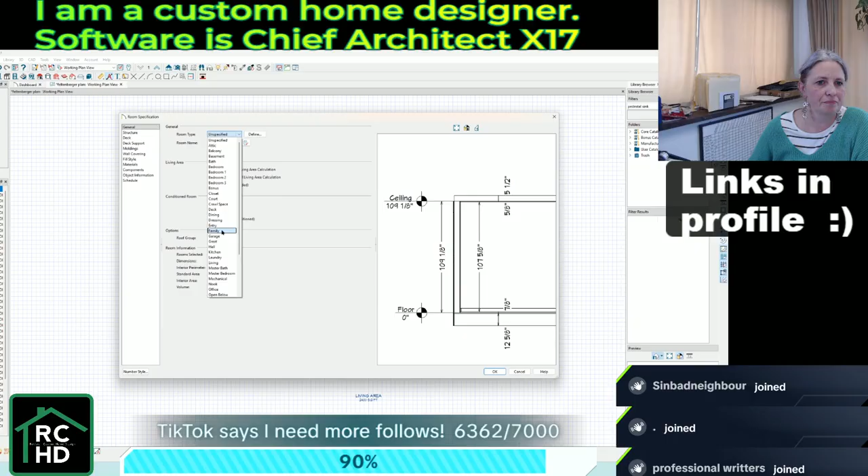So we've got our living half and our garage half. Let's get these dimensions out of the way. Right now it's showing me that my living area is 2,400 square feet, but that's because I haven't done this yet. Boom, garage. So now our living space immediately drops down to 1018, which is our 25 by 40 side of the house.

All right, super easy. I already have my default set at 9 foot. We're going to go with standard door heights throughout this. Over on this side, we want to do our garage doors, and he wants 2 9-foot doors. So there we go, and those are both 9 foot. Then we just make it all nice and even.

So garage, basically done, pretty straightforward. Probably just to be safe, we might throw a door back here at the corner. And then I'm going to change it to a slab because we don't need windows on that door. Again, just to make the numbers nice and easy, give us whole number spacing. So like I said, there's the garage.

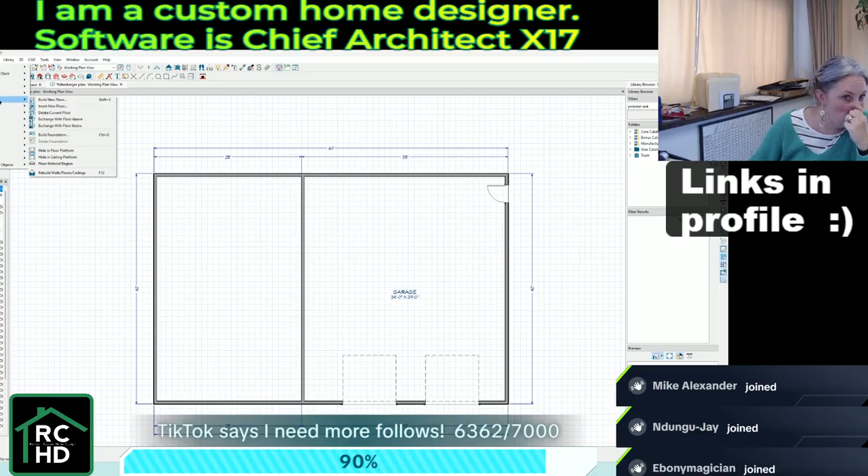As long as we're at it, we might as well do the other really simple stuff. So we will build our foundation, which is, let me double check, it's either a monoslab or a crawl space. Monoslab. Okay.

And then we just double check our garage and make sure that the software didn't decide to make it a big giant drop. Right now it's 3.5 inches below the main house. So the slab is essentially poured with that little bit of an offset. Keeps any moisture from getting into the house, bugs, that kind of thing, well, doesn't really help with bugs, but whatever.

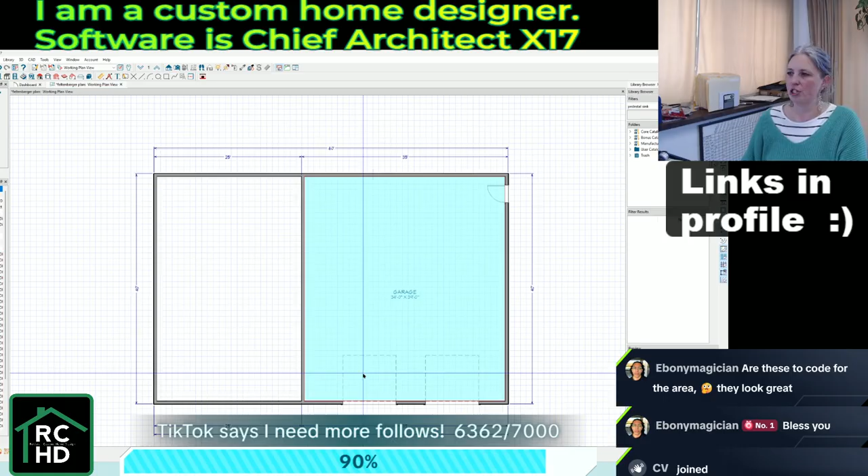Are these to code for the area? This is just general building code. This one's being built in Montana. There's really minimal code in this particular area. It's county land, so other than just typical, we don't want the building to fall down code, that's what we're working with. And then standard spacing for like plumbing, toilets, and all that kind of stuff.

So the second thing that we're going to do super fast is the roof. Now, I could use automatic roof tools, but this is the simplest roof ever, so manual roof tools will actually be faster. So we go like that, use hotkey number 2 to join, and then we double check our 18-inch overhang. Boom.

Drag there. And then I don't remember if the client had specified. Sometimes clients know what they're doing and they'll specify a roof pitch. This one I don't think did, and I don't think we have any vaulted ceilings or anything like that. So, nope, no vaults, so this one's going to be really easy. In this neck of the woods, I'm going to just make this a 4-12 for our pitch. So that means if we were to go outside right now, there we go, we have the simplest, most basic house there is, which is awesome.

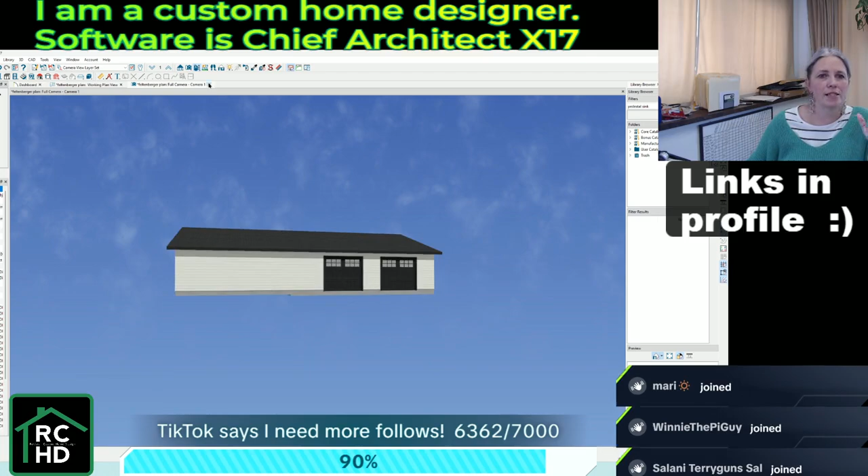Exactly what this client wants. Okay, and then my preference, I always move my roof to display on the floor above. I want it to display on the attic level. So if I go up there, now you can see there's my roof. Just makes it easier when it comes time to do layout pages.

So, all right, easy stuff out of the way. Now we move into the house. For the house, we want 2 bedrooms, 1 bath, and then basically laundry, kitchen, living room. So the easiest way to do something like this, we're going to grab our things.

2 bedrooms, 1 bath. Double check here. Okay, so normally speaking, even though technically it's 1 bath, we are going to rough plumb for a bathroom out in the garage. So I'm just going to make a quick little note here.

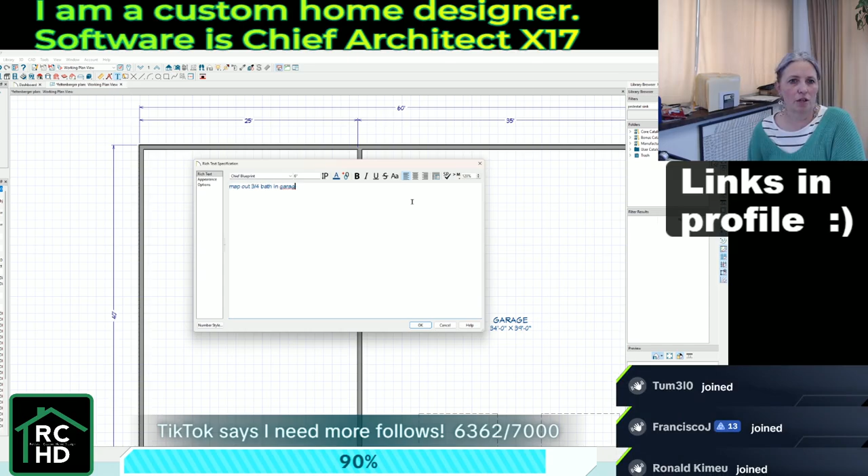Map out 3/4 bath in garage. I just do this to make notes for myself so that I don't forget to come back and do this later. So this first bathroom, the one that's actually in the house, is essentially kind of the master bath, but it is the shared bath.

We want, okay, 3 walls of tile with a shower curtain for the shower. There is no tub. 1 sink, and the toilet can just be open. It doesn't need to have its own closet. So this is not an incredibly huge master bath or master bedroom. So we're going to go ahead and just kind of grab this, grab that, and then let's do something.

We want the bathroom to be accessible to both the master bedroom and the guest bedroom, because this is the only bathroom in the house. So we need to figure out how we want to map this out, because of course the issue is you need your bedrooms to have egress.

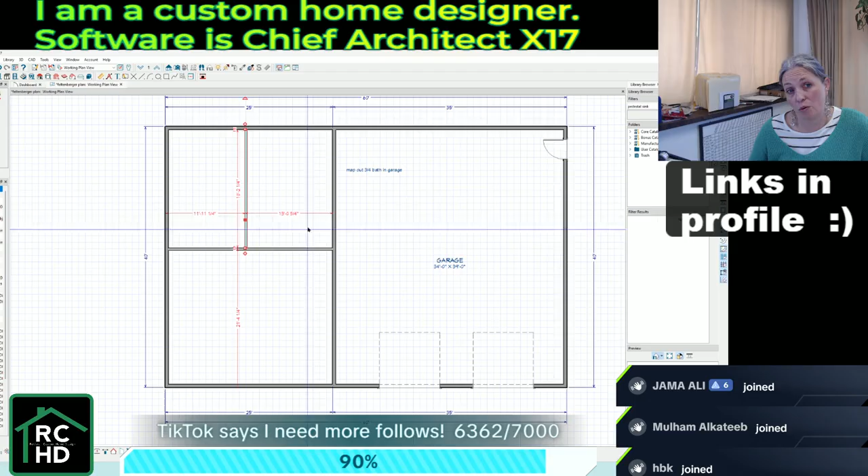So your bedrooms have to be touching an exterior wall. So my first thought would have been, tuck the bathroom here and then have bedroom, but that's not going to work. So I think what we're going to do here is...

Actually what we could do, hold on. There's 2 ways we could do this. And this is where literally I am diving in. This is my brainstorming session. I brainstorm while I'm working on this because that's just how things work. So there's 2 ways that we could orient this house.

We could have the 2 bedrooms back here and then somehow carve out the bathroom wherever. The other option is to do bedroom back here, bedroom up here. Excuse me, sorry. I had one of these monster drinks today, and I'm not a huge fan, but I gave up soda a while back, so I'm not used to all the sugar and carbonation and whatever.

Anywho, so we could have 1 bedroom in the front, 1 bedroom in the back, bathroom kind of in that pass-through, but then that kind of stretches out this whole kitchen, living, dining kind of long and narrow. And I think I do want to try and keep this part open as much as possible. So that being said, our bedrooms are going to go back here like this.

And then we'll probably do like bathroom. Let's do, again just notes to myself, kitchen, living, bath. And then those will be the bedrooms. We'll do closets. And then if that's the bathroom, we'll also do kind of like, see, that breaks it up a little bit more. I don't really like this.

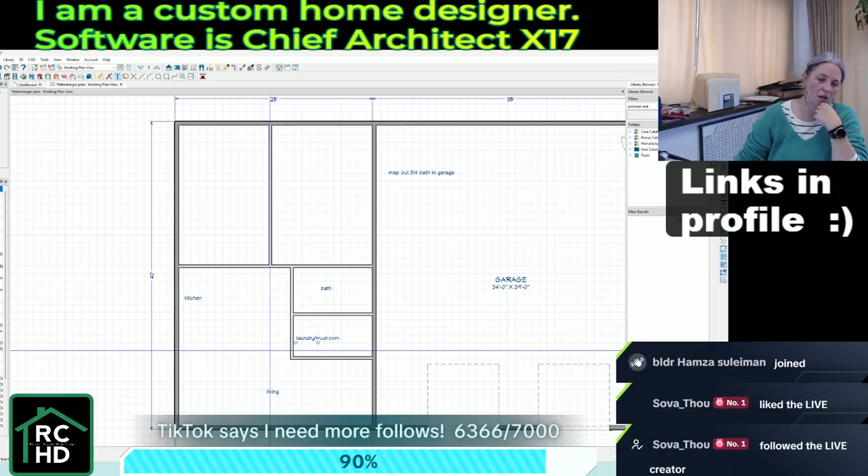Okay, so now let's start throwing some dimensions in here real quick. All right, so 18 is definitely deeper than it needs to be. Let's quick go to 16. Oh, we need...

And we do want one of these to be slightly larger than the other. Normally I would say I'd want this corner one to be the master, but I kind of want the master to be closer to the bathroom, so I don't know. Actually, let's do this. Let's do like that, ish. And then one of these can have kind of a slightly bigger closet.

So yeah, let's make this one the master. Let's do 11-foot one there. Okay. Closet 2-foot one. 3'7" maybe? That should do it.

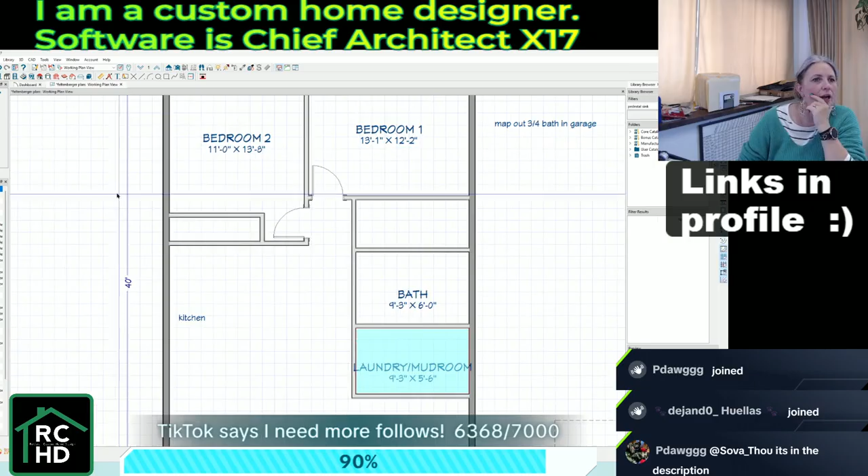Thank you. Okay, door. So then we want to go into the bathroom here. We'll do a walk-in closet here. And we'll do sliders for that closet. Okay.

Bathroom will be like this. He was going to do tile on 3 sides and a shower curtain on the other. So actually, this bathroom does not need to be 6 foot, we can go to 5 foot. There we go.

Okay, so that puts us with a shower pan, and we're just going to do, there we go. And then for our shower pan, it's going to be 60 by 30. Toilet. Okay.

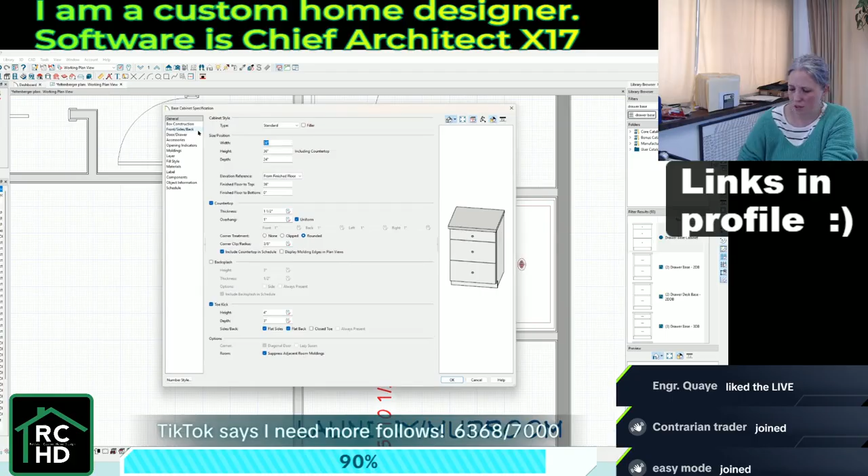Let's make that a 9-inch drawer base. And then we need a standard sink base. Copy, paste. So we have 7 inches left, so that's enough for each of these to be, okay, and then

Undermount sink. I'm going through this as fast as I possibly can.

Okay, so there's our walk-in closet. And actually, if we want to get a little more space out of it, we can flip that door, flip the hinge, do that, and add a little bit more there. So, all right, so now we've got that closet.

13 by 12, that's a little on the small side. But 11 is really on the small side for that. Shoot. Yeah, this is not huge, because he did say he wanted a king size bed in here. Oh man.

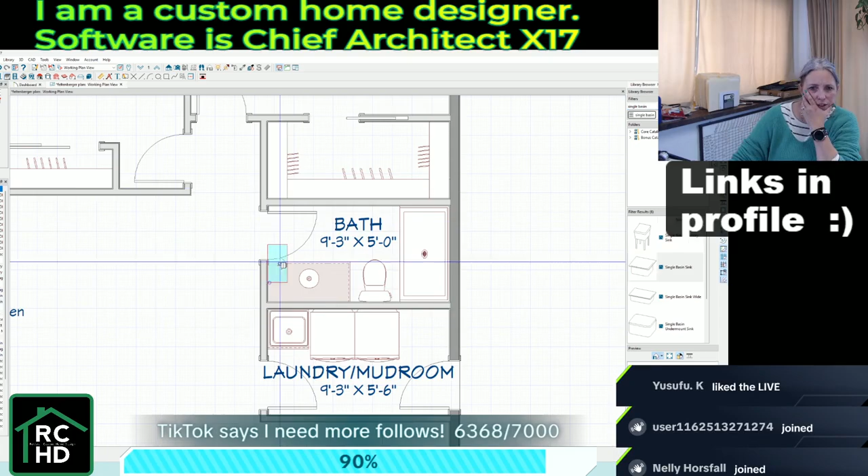Okay, laundry. Okay, side by side and a sink. Okay, then we need a base cabinet. We have our sink, and then we should probably do either, I'm going to do a tall cabinet here.

Yeah, but normally I would agree with you, but the client did want a walk-in closet for the master. So, because yeah, normally that's what you do is you do that in the dividing space in between the two. But even at that, that takes up 2 feet here.

That would make, I don't know, because here I got to get a king. Let me grab a king bed here. So there's a king bed, which is not terrible. But if you cut that in half to get the closet, A, you lose closet space, and B, we'd have to create a different way to get in. It just eats up a lot.

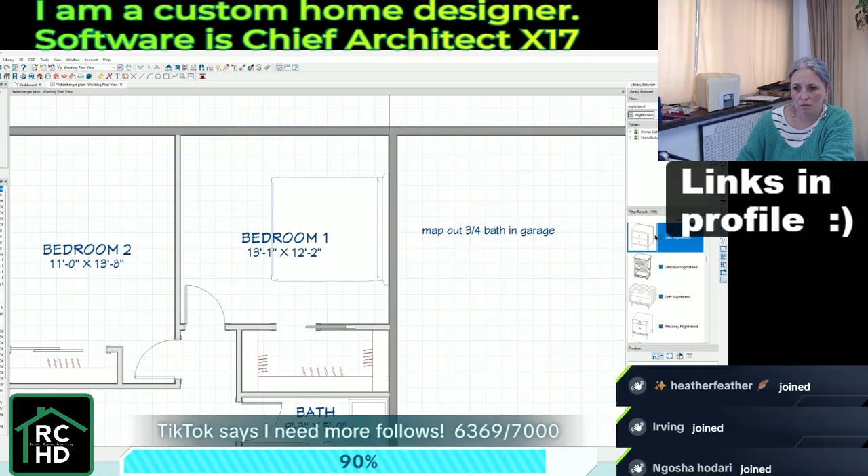Okay, then we need a nightstand. That's kind of cute. Okay.

Let's do that, the other bedroom here. See, we also want a king in that bedroom. So, and this is where people don't realize how much space some of this stuff actually takes up. So we can get another nightstand, 2 nightstands and a bed in there, but in this room, we don't have room for a dresser. In this room, we do. So, personal preference.

Okay, oh, shower curtain.

So we have the closet, we've got a small closet, bedroom. Laundry, mudroom is pretty straightforward. You come in from the garage, you got your sink and

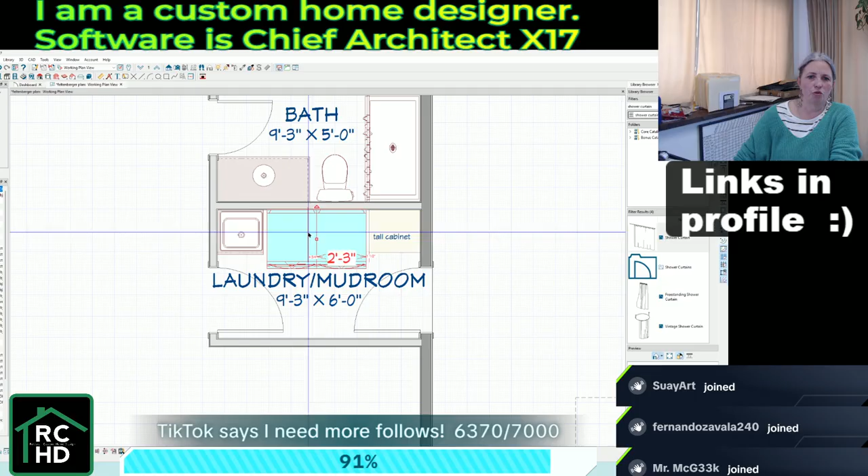That. Normally, I'm going to add a couple inches, because generally speaking, I don't like to do small doors on the laundry room because A, it's a frequently passaged area, and B, if you ever have to do maintenance on those machines or get them in and out, you don't want to be in a situation where you've created a pocket where you have to take the door off the hinges to get that machine out. So we'll do some upper cabinets here real quick.

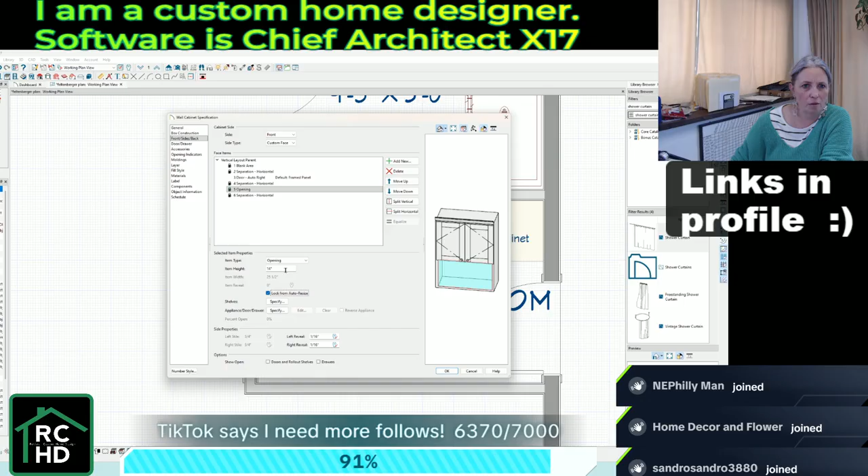And then on this one, so it creates... actually let's make that a little bit shallower. And then box construction, we're going to get rid of the bottom, so we have just that above the sink.

Okay. All right. And we got a 36-inch door. Awesome, thank you for the follow. All right, so here's our living room, here's our kitchen. I'm just going to call this whole thing great room.

And I probably asked some dumb questions during this because, yep, there's no walk-in pantry, no seating at the island or peninsula, so that's good.

Honestly, I think we're probably gonna do like a little U-shaped kitchen here. And actually, you know what I might do? Here, hold on, let me pull up a different file here.

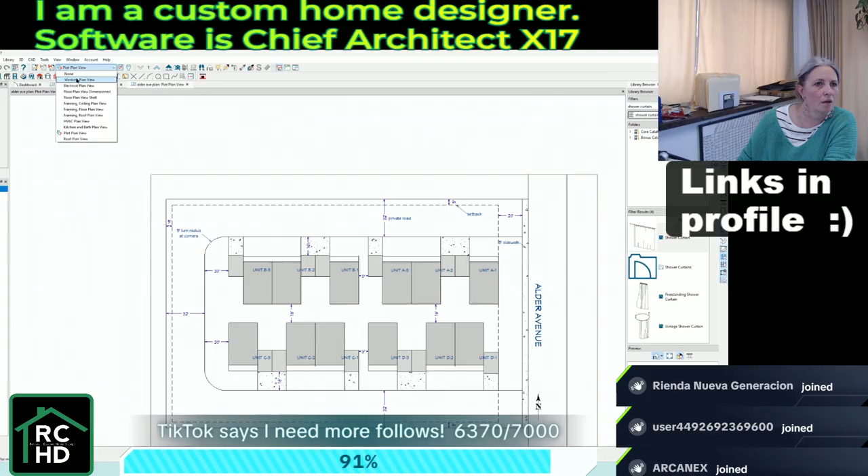Ah, here we go. Okay. Hold on, I want that. Copy, paste, rotate. There we go. Super easy. And then I can close that.

So that made that really easy, because I already know that this is a compact space-saving kitchen. I know it fits. Oh, holy cow, that fit like perfectly. And then push that on over.

And then we just need to check our dimension here to here. We'll do, actually, let's do 3'9". There we go. And then here we're going to do just a little half wall to back this up.

But the client did say he didn't need an extra eat-in area or anything like that. And then I am going to add a little more cabinetry here, because I feel like we just need that extra little bit of space.

And honestly, I'm going to put the dishwasher on that side. Okay. There we go. And then if we were to look at that in 3D.

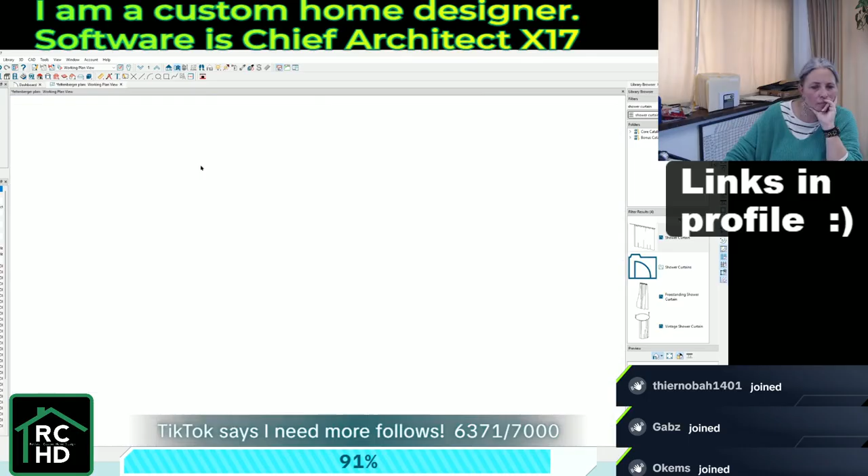Okay, so what I do need to do is I need to get rid of the cap on this wall. And then extend the countertop just a couple inches just to make it look finished. So we're going to come over here.

Grab that, and then I'm just going to drag that down to the end. Okay, so if we look at that in 3D, now you can see we just have that nice little finished edge on it.

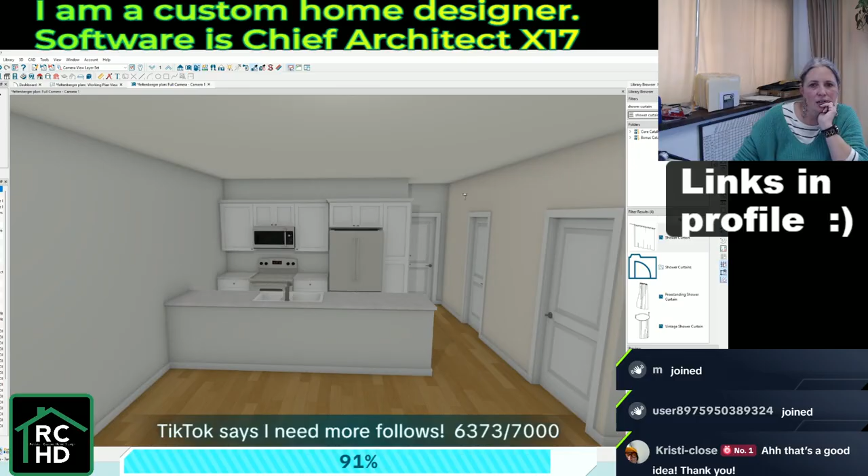Then, okay, and, oh hold on one sec, that is an electric range. We want a gas range. So let's quick pull that out.

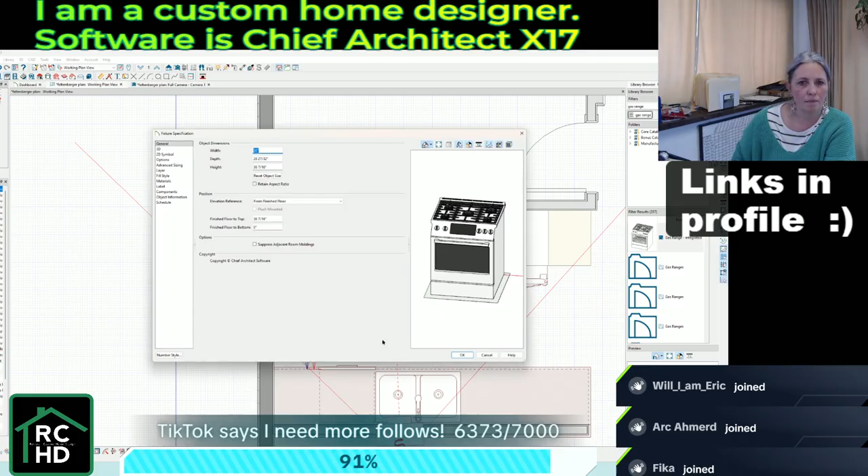Hold on, go to plan view, it's easier sometimes. Okay, so we got our range. Again, we need to change the color. And then slide-in range, microwave above the stove, 30-inch.

Cabinets do go up to the ceiling, so that is one change that we need to make here. Oops. Okay, so we need upper, okay, let's take this one. We're going to duplicate this cabinet. So we're just going to drag that on up. Floor to bottom is 90, that's correct.

That's correct. Okay, so then we can go ahead and remove the crown from these cabinets.

This crown we're going to change to a shaker style, and I'll use base molding. Make sure to offset that so it goes up, so essentially that fills that gap up there at the top.

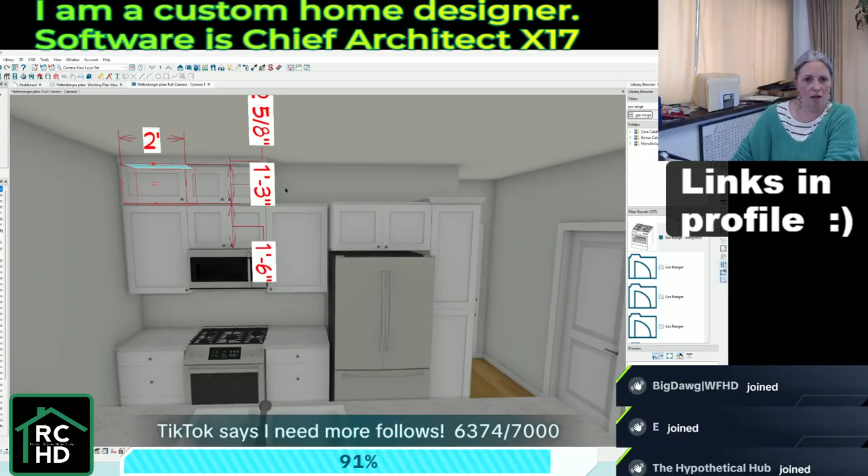Okay, then we're going to make a copy, drag it that way. We know it needs to be 24 inches wide. We know that the hinge is on the wrong side. Okay, copy, paste, but now the hinge is on the wrong side again.

Okay, make another copy. This one needs to be 36 inches wide. The height is correct, the depth is 24. Floor to the bottom is 90.

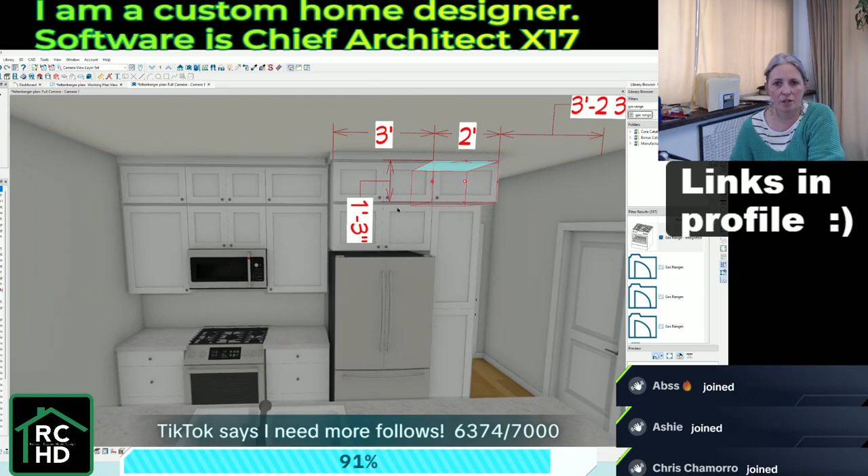And then this tall cabinet, again, we get rid of the moldings on that one. This needs to be 24 inches for the depth. And then we'll slide that over. And this cabinet is only 18 inches, so there we go. So now we have our bank of cabinets.

Now on this one I did an end cap cabinet, but because they're both finished, I think it works. And then real quick on this one, we're just going to go to our right side, custom, and instead of door, we're just going to do door panel, so that way we don't have the hardware on that side. But now you see we have this finished corner. So there we go. And then our cabinets go all the way up to the ceiling, so we've got lots of storage there. We should probably do the same thing in our laundry room.

Hold on. So we'll real quick go in here. We'll get rid of that molding. I'm going to come over here, grab this cabinet, copy, paste, make this one 2'3".

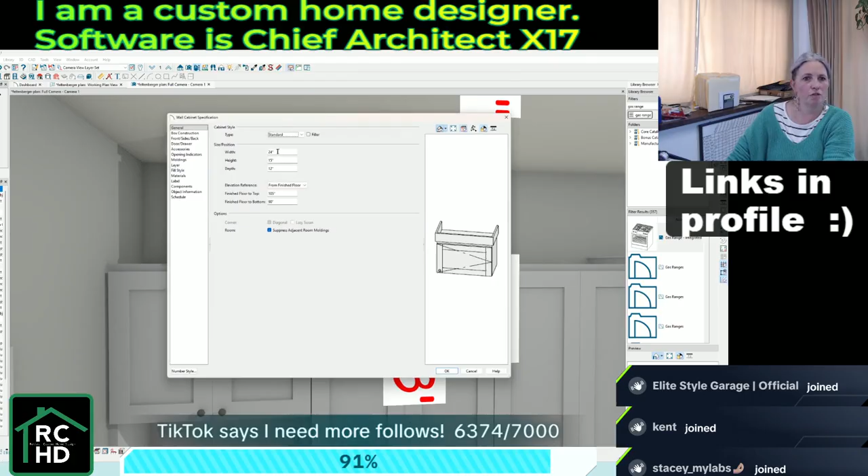Oops. It's weird because if you're almost about to hit the wall and you try not to hit it, it'll stop you. But if you already go through the wall and then try not to hit it again, it'll keep going. Okay, so copy, paste.

Paste, and then this one, oh, also the same, so paste, except that one needs to be 24 inches for the depth. And again, the tall cabinet, we need to delete that molding.

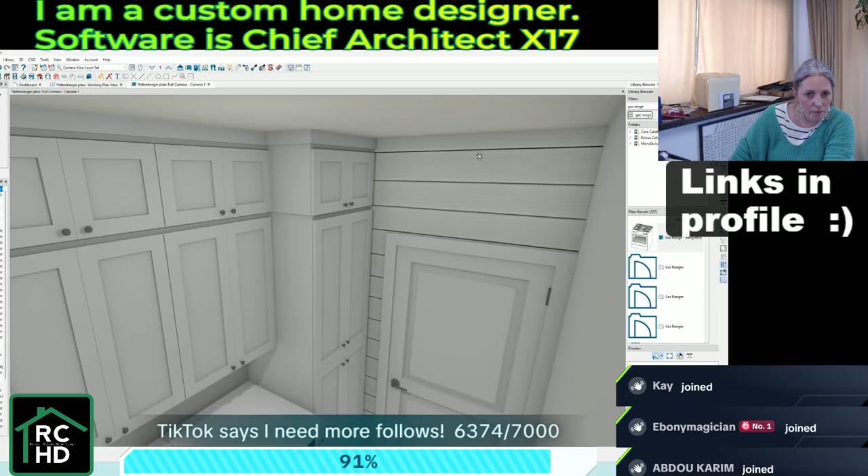All right, so now we've just made our cabinetry in our mudroom awesome as well. Easy. Okay, I see I've got siding on this wall.

Apparently I forgot to pull that off when I... all right, so that got our siding off of that wall.

Okay, next, windows. You wanted to do sliders.

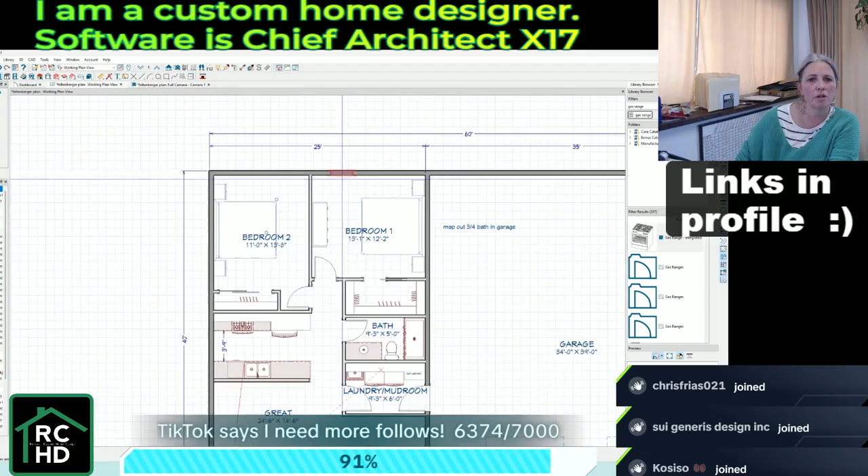Okay, so we're going to go here, grab our window tool, go into the bedroom. We're going to make these right sliding, doesn't matter if it's right or left for the moment. We're going to do 60 by, we'll make them good sized, 60 by 54. We'll hit OK, copy, paste, make nice even spacing.

Here we're going to do a casement instead because there's not enough space otherwise, but we might as well add a little window there. And then we want to do like a patio door.

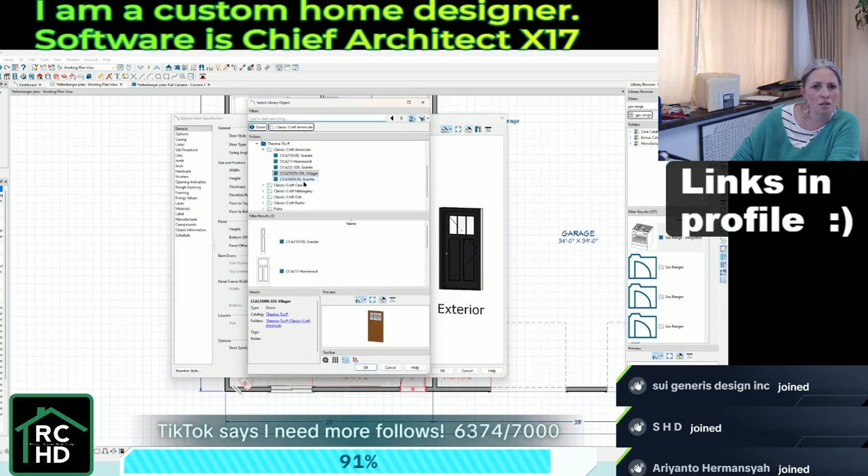And then we need to do a front door, and I'm going to just change the look of this one a little bit. That one. And I'm actually thinking, let's kind of move that.

He said he wanted 6 seats at the dining room table, but that seems a lot for this house. I'm going to pull that chair real quick. That's kind of a cute one.

So we'll do that. And then so you can probably fit 6 around this. Yeah, actually, let's do that. So let's delete. Let's.

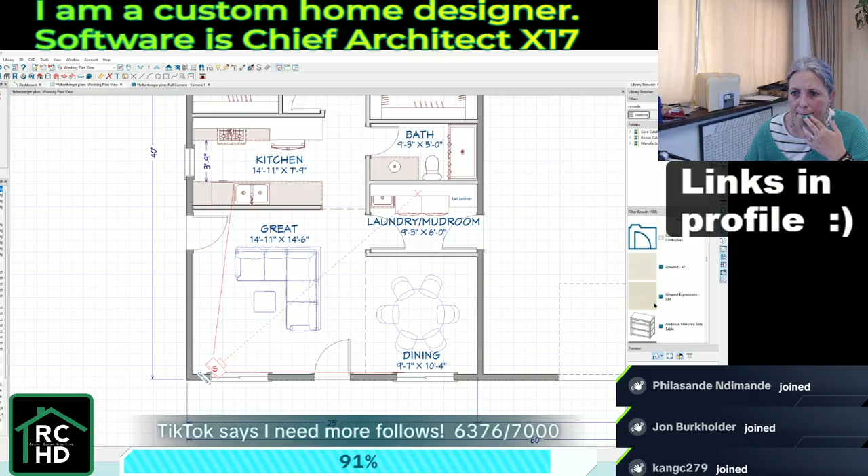Okay, and then that's massive. Oh, that's kind of cute. Okay, so we'll throw that in here.

All right, so then if we look in our view, I like this dark fabric. I wonder if I can get that on the sofa. Oh, yeah, yeah. Chair. The ottoman's too much.

Okay, so then we'll move our camera to the exterior. For the exterior, he wanted like a dark beige tan metal siding. So pull up standing seam. Here's beige.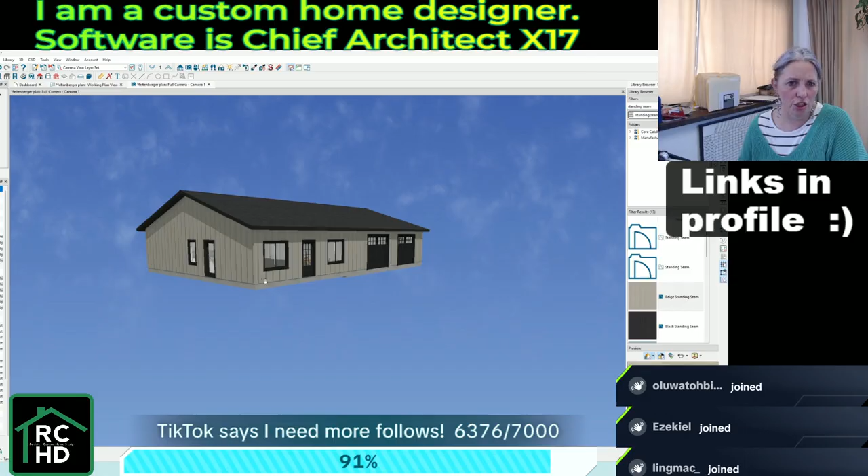Okay, and we need to paint that door. And then black trim, yes. Dark green for the roofing. And again, we're doing metal. And no stone or brick.

I'm not sure, I wonder what the... there's the brown. Yeah, let's do the brown. Okay, so black trim, brown siding, green roof. I think that looks good.

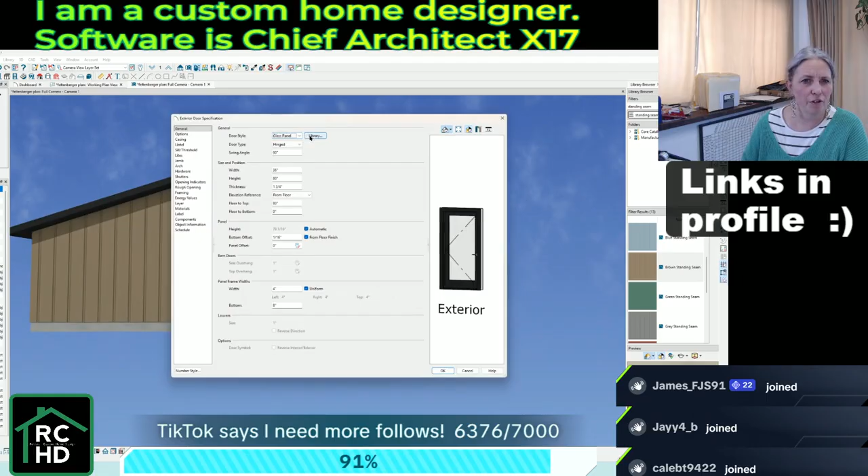I'm going to change this door real quick so it kind of matches the front door a little bit. That is the full glass version of the front door.

And then again, we'll make sure to make that black. So that's the, oops, don't want the siding to be black. Not on this project, at least. So there we go - front door, side door, garage door.

All right, so then all that is left... we've got mechanical here, somewhere kind of back in this corner. And then we want to do like a little 3/4 bath out here.

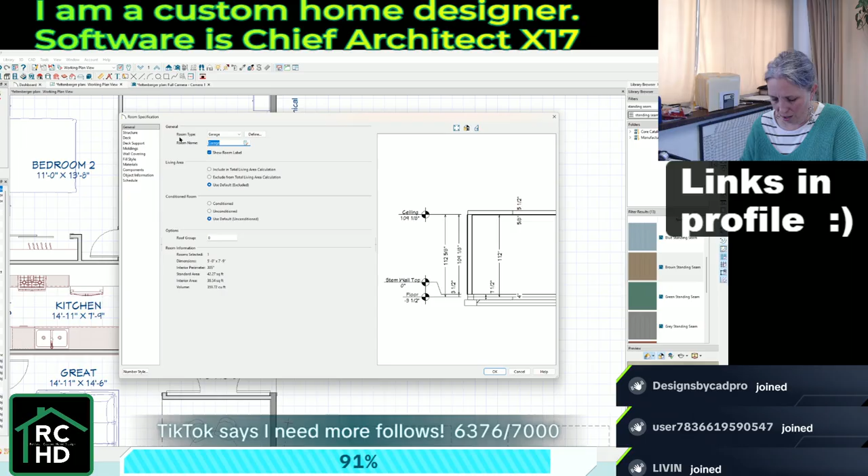We're going to leave that labeled as garage so it doesn't change the floor level or any of those calculations, but then we're going to manually rename it bath. There we go. Then we're going to grab toilet.

Throw a shower in there real quick. Slide that in the corner, make sure we don't have our clearances overlapping. And we'll do a pedestal sink here.

And then I'm just going to make a quick little note here: rough plumb for future. Because we want to show that we've got it, we want to know that we've planned for it, but we're not necessarily going to finish that now.

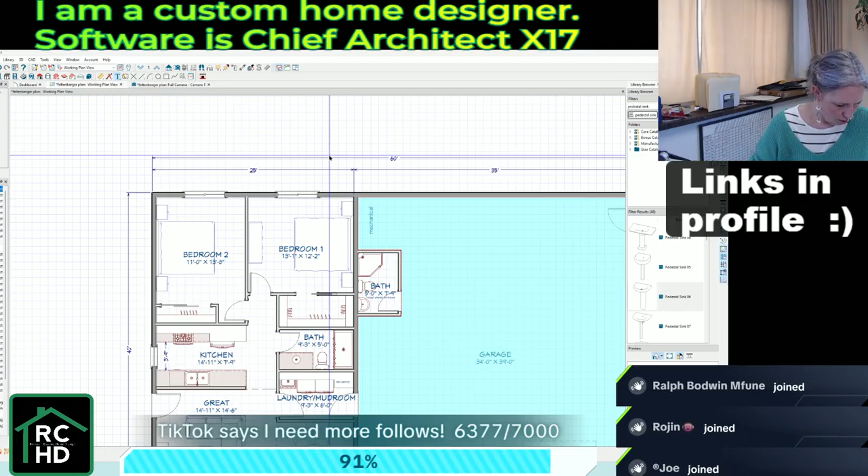Oh, we need to do a little tiny slab here by the front door. And then that also means with that, just a little tiny roof.

Okay, so we'll drag this to here. We want this to go... okay, now if I drag this up, display on floor above, we go up. Oh.

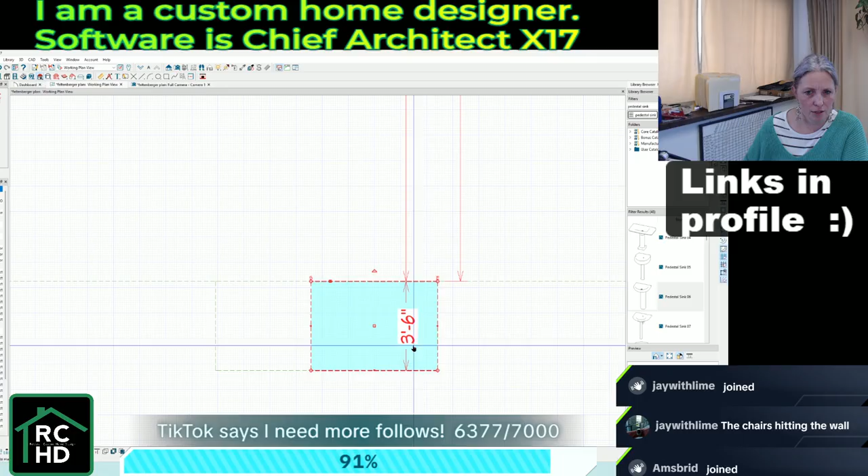Well, that is not correct. Hold on. Fascia 105. There we go, that's centered. And actually, we want those to be probably a 6/12 pitch, not an 8/12 pitch.

And then we gotta drag that back, break, break, break. And then use hotkey number 2 to get our join. Do a quick little break here. And then quick little break here.

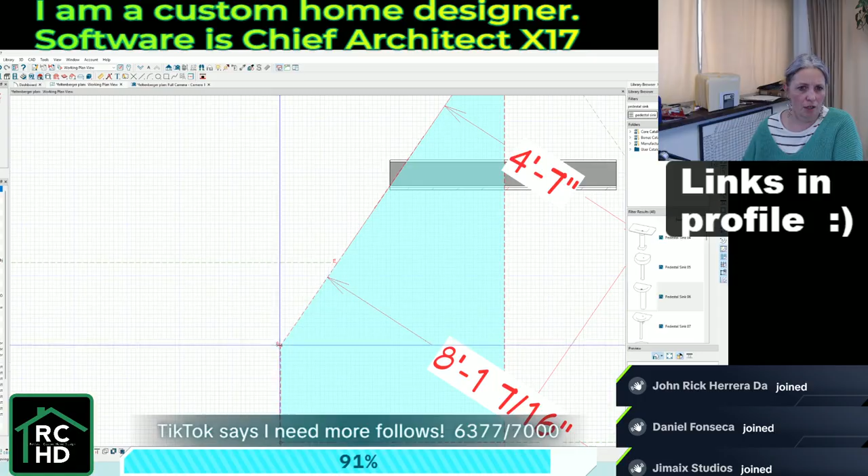And then if we go to our exterior, you'll see we're pretty close. That's not exactly what I wanted. Yeah, we're a little funky there. It's off center. F9. Why are we off center?

That's a 6. Fascia's at 105. That's a 6. Oh. There we go.

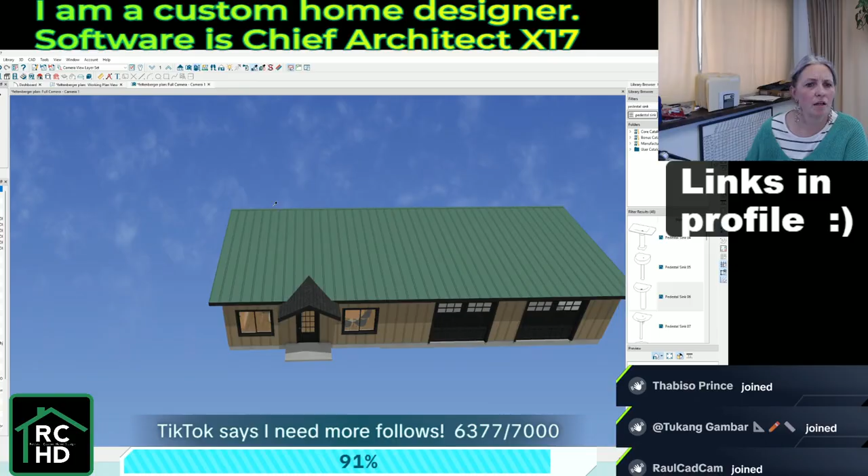The chair's hitting the wall. Okay, and then we just gotta do our roof. It's a tiny bit on the snug side, but it's doable.

And it depends on what size table they actually end up going with, but that just shows them what's a maybe. All right. Okay, and then I think we're just far enough out that we probably want to do some posts for that overhang.

And then a single copy over here. Go out to 3D. There we go. Is Chief Architect as good as ArchiCAD?

I have not used ArchiCAD. I haven't used, well honestly, I haven't used anything but Chief Architect in about 20 plus years, so I can't specifically say. I can say that when I left AutoCAD to start using Chief Architect, I was so happy and the learning curve was super easy, and I would never go back. So there's that. All right.

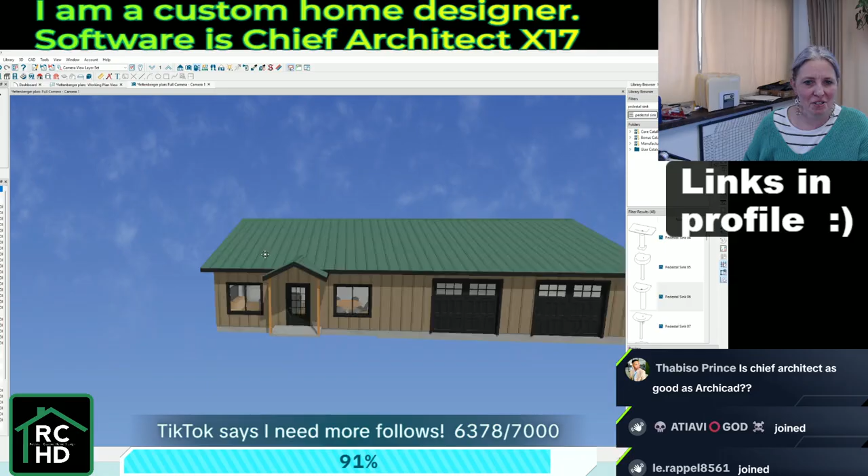So we got that. He did not want to cover on this side. He may add a patio in the future. He travels a lot for work, and so this is one of the locations he's going to go to. So he doesn't need this to be all frilled out, this is a very basic everything.

All right, did I ask him about flooring? Painted, leave as concrete. Okay, so let's do stained concrete. And for that, I'm going to go to this view called Dollhouse View, and I'm just going to do a basic light stained concrete throughout.

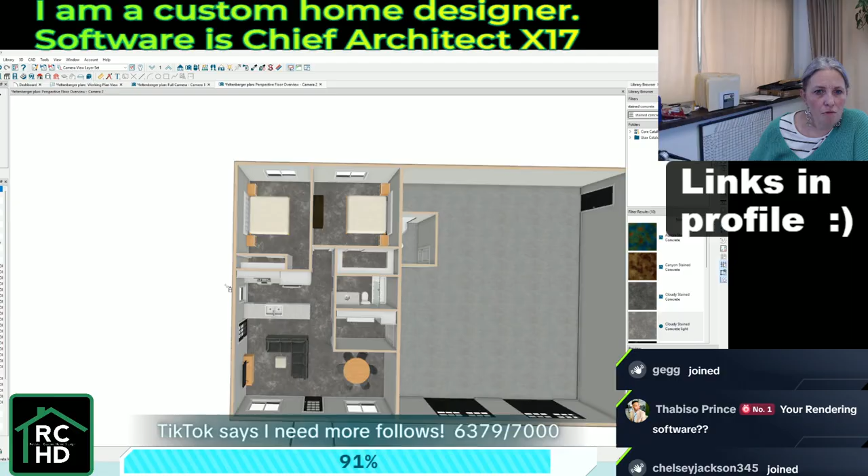Okay, so that is the house. I'm going to change the color of the wood on some of this furniture. I don't like that white edge.

And then I don't like that fabric that's in the bedroom, so let's do... and that's kind of a, well, no, that gap's okay. And then really quick, again, we're not doing anything crazy fancy here, but I want this to look realistic.

My rendering software, Chief Architect, is an all-in-one. So I do my brainstorming, my construction drawings, my rendering, everything all in one. And we'll get to the rendering here in just a moment.

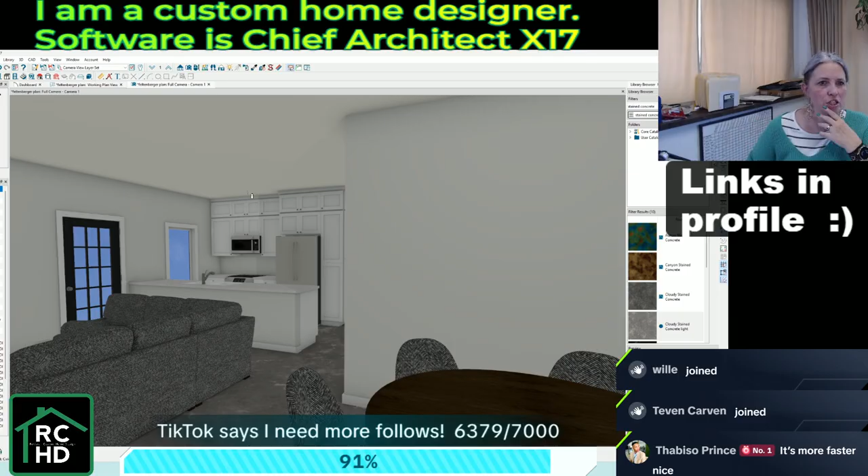Okay, so we're going to come back here. Oh, I don't like that on the headboard. All right, well.

Yeah, doing everything all in one software, I mean, if you can, definitely the way to go.

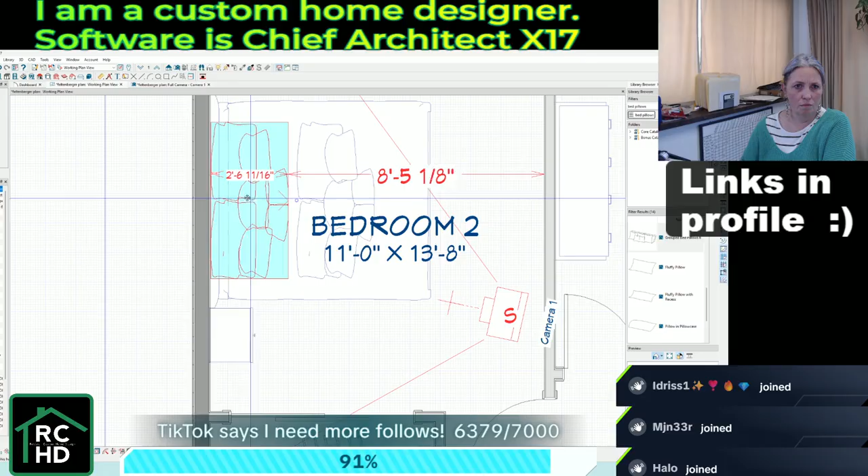That's not bad, okay. And then we'll copy paste. There we go, I like that. All right. Da-da, and then...

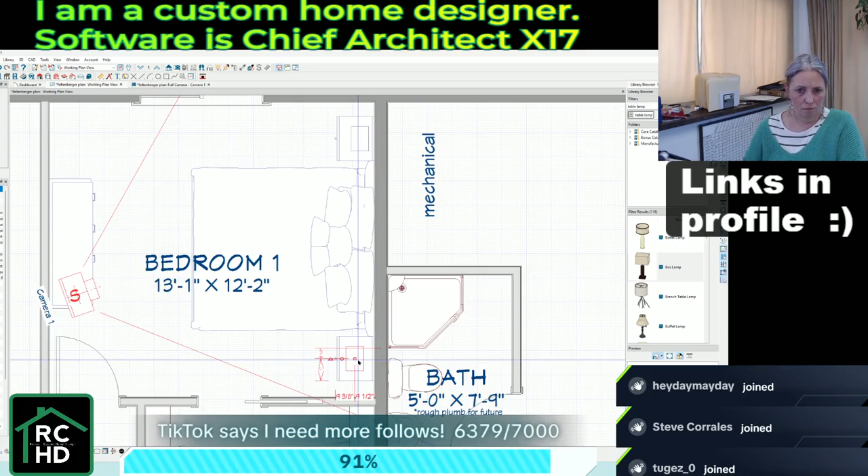I just need to put in the bare minimum of lighting so that I can render this properly. So I'm just kind of running through here real quick. An exhaust fan light combo in both of the bathrooms. Vanity light above the sink in both bathrooms.

Really simple, small-ish. Yeah, it's not bad. I'm not going to do pendants in the kitchen. I think that would just be a little bit too much in that space. We'll just throw some lights down like that.

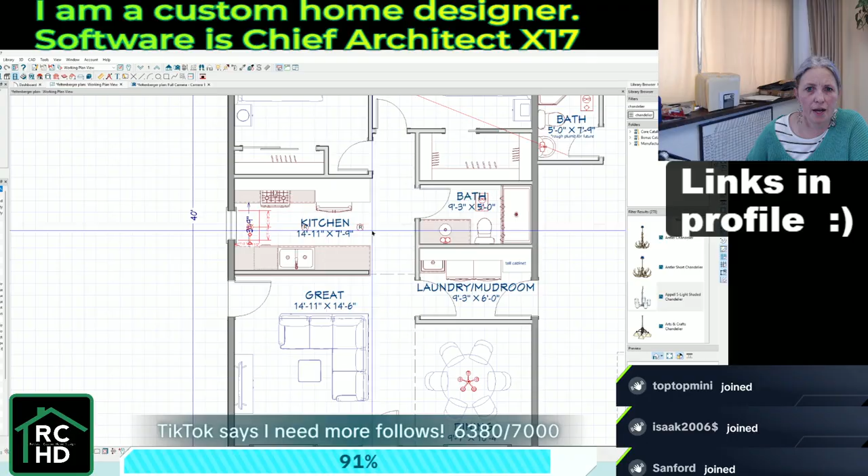And for the moment, yes, I'm just using can lights, but we'll do here and there. We'll do a couple lights in that closet. We've got the lamps. And then we'll do corner, kind of the four corners there, and just a little basic middle of the room.

Oh wait, I'm doing ceiling fans. Oh, in the bedrooms. Okay, so hang on a sec, undo that.

Ceiling fan, and ceiling fan. And then in the garage... and I am typing way too fast. There we go, we'll do here and there. Okay.

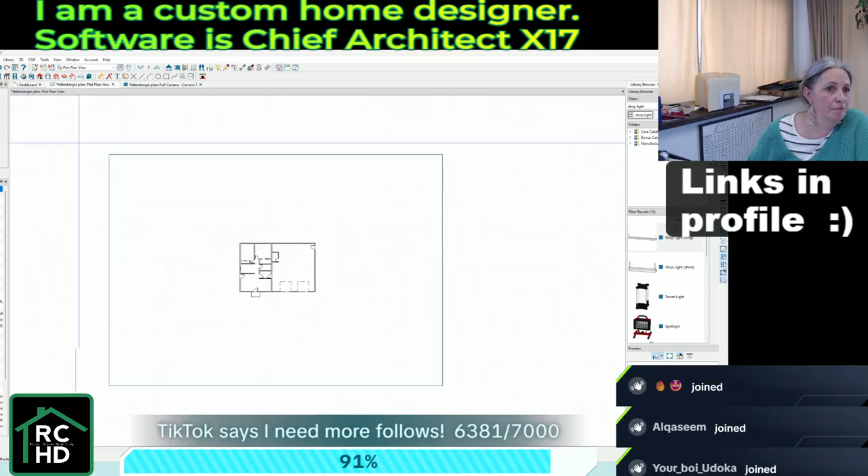Terrain driveway polyline. And we'll do a little break, drag that on over.

All right, so nothing fancy. It probably won't even be paved, it'll probably end up being gravel. Software is called Chief Architect, it's up at the top of the screen. But that at least gives us something.

And then throw a backdrop in here. And I know this is one of my favorites for my mid and eastern Montana clients. My western Montana clients, they get mountains, but here on our part of the state, we get kind of this scrubby hill.

Okay, so then 3D render techniques, switch over to ray trace. This is our photorealistic view. We do a few things real quick with our lighting.

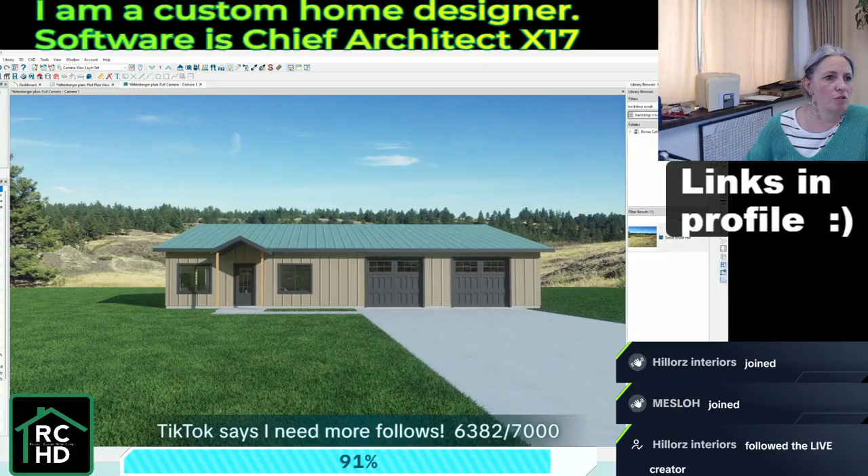So first we adjust our sun. We do not need that bright, so we drop it down to 26 and then uncheck that so we can play with our light and shadows. Then we go to this and we switch to a new light set.

Because when you're doing ray trace, you want to control the lighting. If you have too many lights on or lights in rooms that you're not using, it can really slow down your rendering. So I just want to make sure I'm turning off anything that's not outside at the moment. Lastly, render techniques options.

I'm going to check the DLSS button, that's going to allow this to go a lot faster. I'm going to beef up my saturation because I like bold colors a little bit. Not going to worry as much about my brightness, and honestly even my exposure I'm going to drop just a little bit because I like there to be some contrast, that kind of stuff. So we'll go ahead and hit OK.

Get that angle where I like it. File, export, picture. Okay, then I just got to pick where I'm sending it. And I just start naming things. Exterior 1, okay.

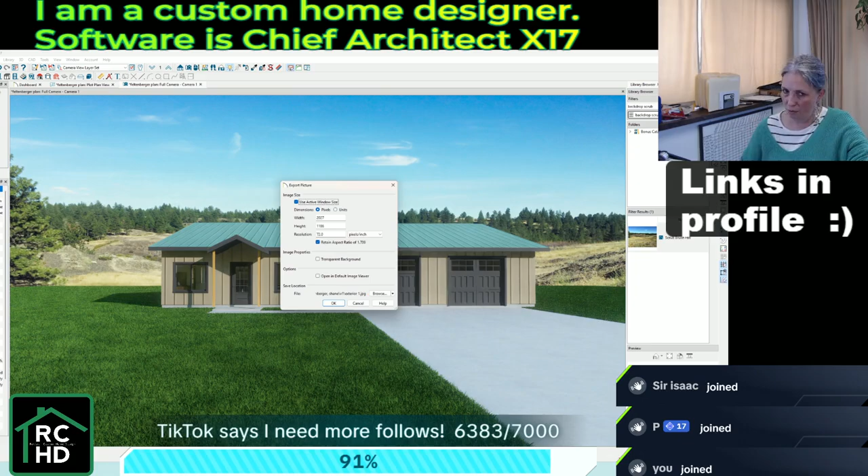Really straightforward, we'll kind of zoom in. File, export, picture. Exterior 2.

Now, if I was doing standard render and not the DLSS, this would take a lot longer. Each one of these images would take something in the range of like 60 to 90 seconds. Okay, I'm going to adjust my sun angle.

And this is less important on a house that is a pure rectangle. When you have something that's a bit more ins and outs and stuff, these exterior renders, when you're adjusting the shadow, really help to show the volume and the mass and the size and shape of the space. When it's a rectangle, I mean, we know what the space is, but I still like to show my clients what I can.

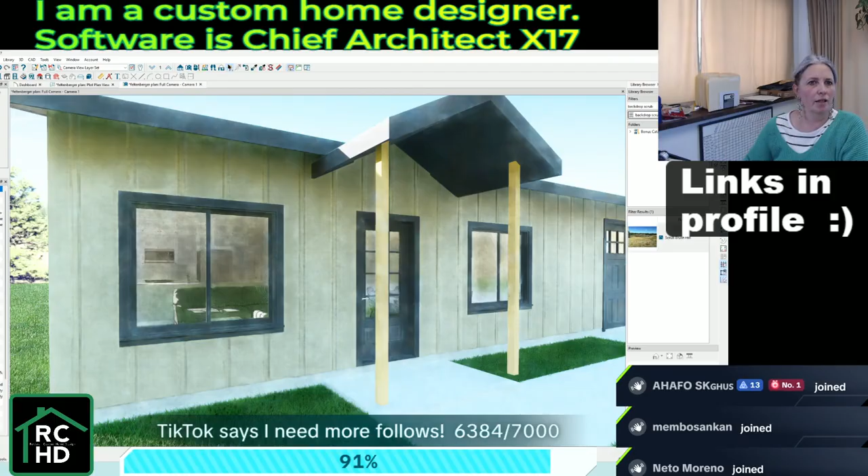File, export. Okay, and lastly, we'll kind of get up here on the front door. And again, adjust our sun angle, like that.

Okay, so now we will align and go right inside the front door. Now we need to turn on our interior light. So we go to our light bulb, new set, and we'll do everything in this front room - the dining room, those recessed lights in the great room, that ceiling fan, and the recessed lights in our kitchen area. I'm not going to turn the TV on because we don't need that.

Oh my goodness, gotta move my legs. All right, and I think that's it for this front space.

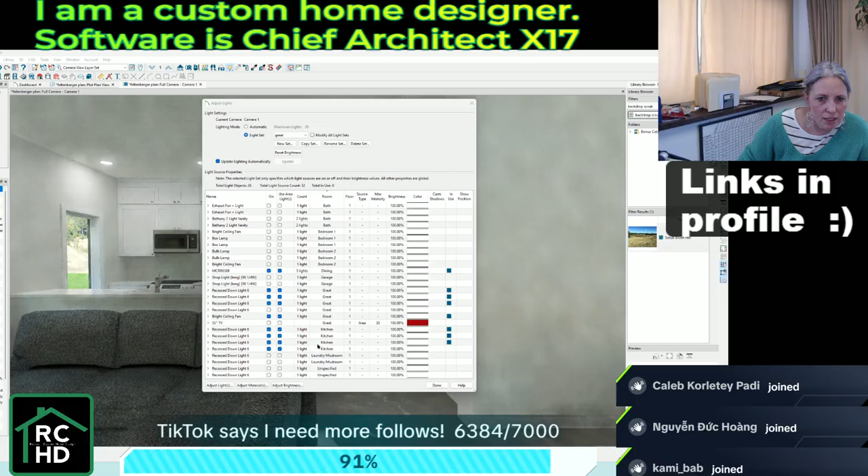Okay, so now we have that, and then what we want to do is adjust our sunlight so it helps our interior. I'm just going to go until I see light coming in. I swear I saw it just a second ago. Oh, there we go.

Ooh, yeah, kind of. I want it to hit the kitchen like that. There we go. So we hit OK. And then File, Export. Now we name it Interior.

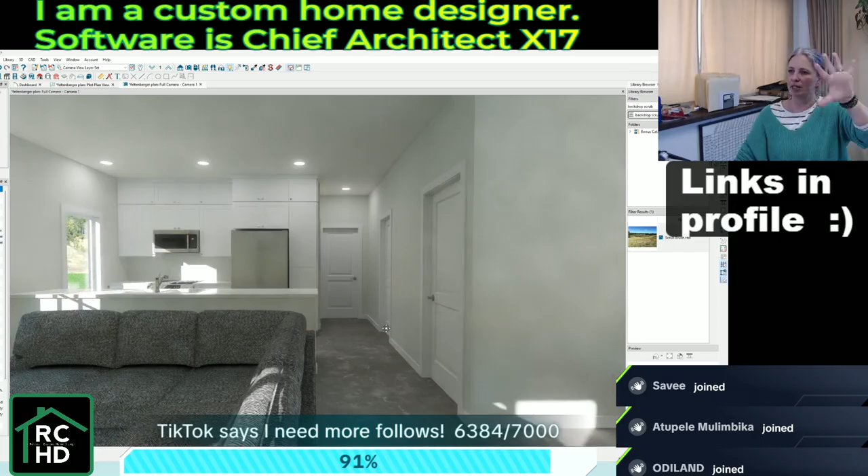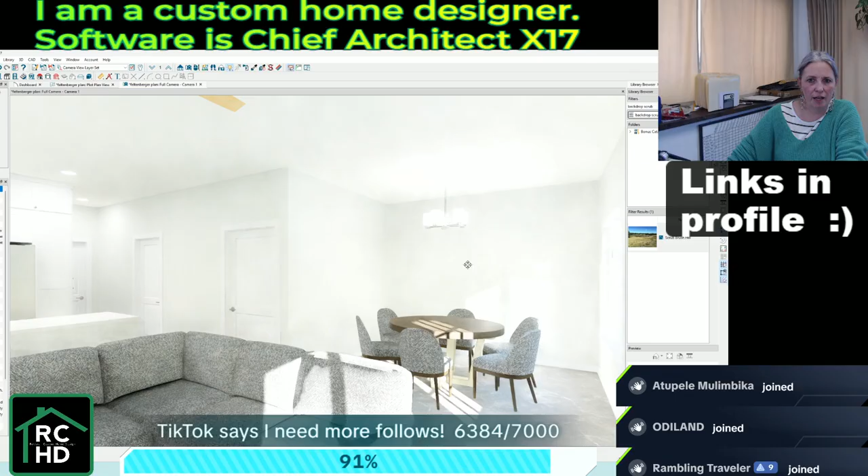But okay, so then we're going to kind of come over here. And I'm not even going to worry about changing the sun angle. I am going to drop this chandelier just a little bit. I don't like that chrome on there, it just doesn't show up very well. There we go. Okay, so File, Export, Interior 2.

Okay, I'll sneak on over here to this corner. Turn and look back. It's listed up at the top of the screen. It's called Chief Architect.

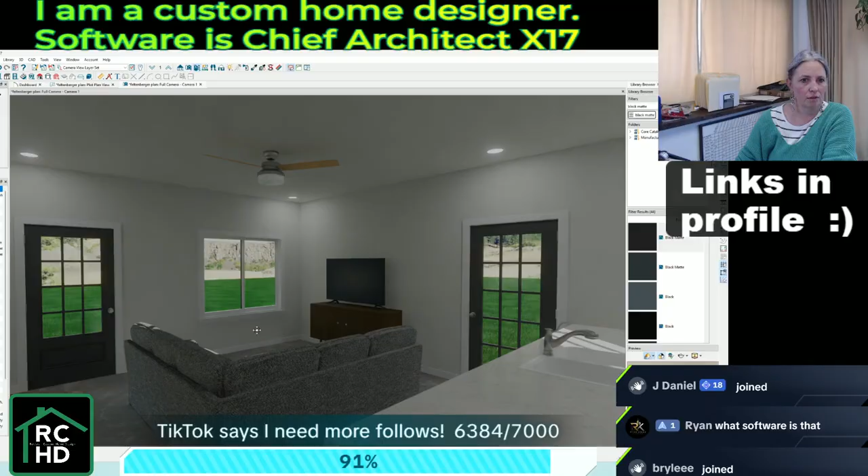Okay, then we'll kind of go here. Beautiful. File, export.

Come on over here. Kind of like that.

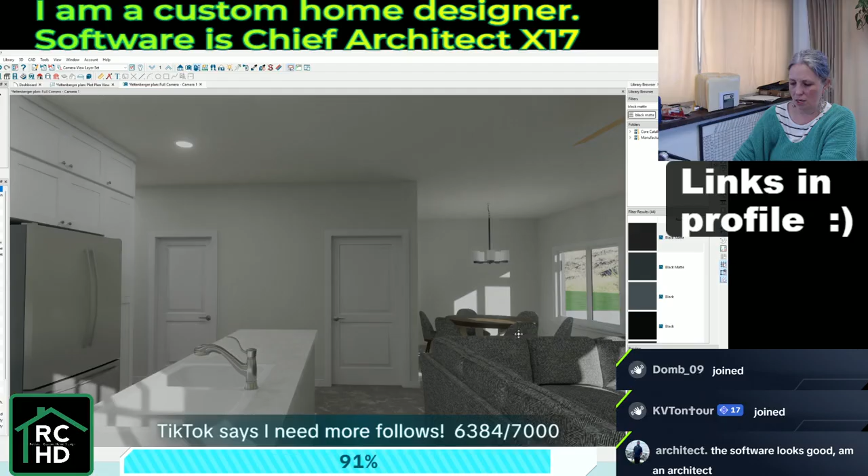So the reason I'm doing these renders is because with every draft, especially the first draft, I always send views of the whole thing, so they can really truly see what, in fact, this project will actually look like.

So real quick, I opened up the doors to the bathroom and the laundry, so I want to quick turn on those lights. I don't know which one is which there, so I'm just gonna turn both of those on for the moment. And then laundry and mudroom. There we go. File, export.

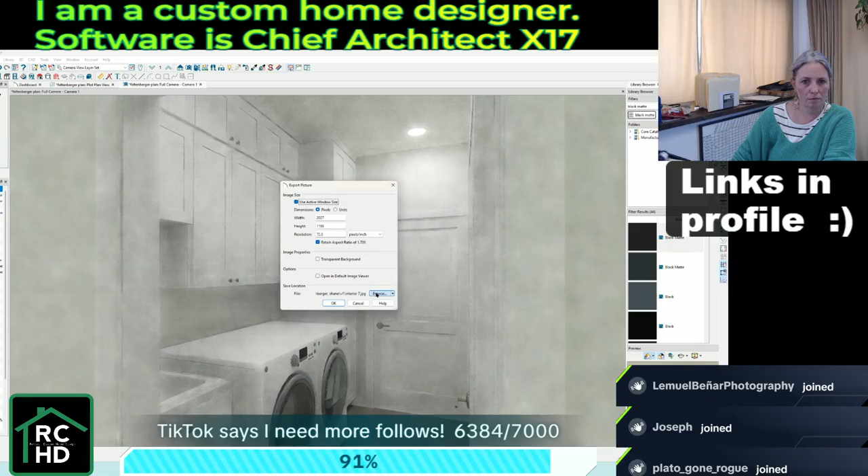Okay, then we'll hop over here and show the laundry room. Then we will come over here and show the bathroom.

And then just a few little things of my own. First of all, that's too tall - the top of that needs to be about 80. But then we'll drag that down so it comes down. Oh, I forgot to show the shower head.

I got really fast on this one.

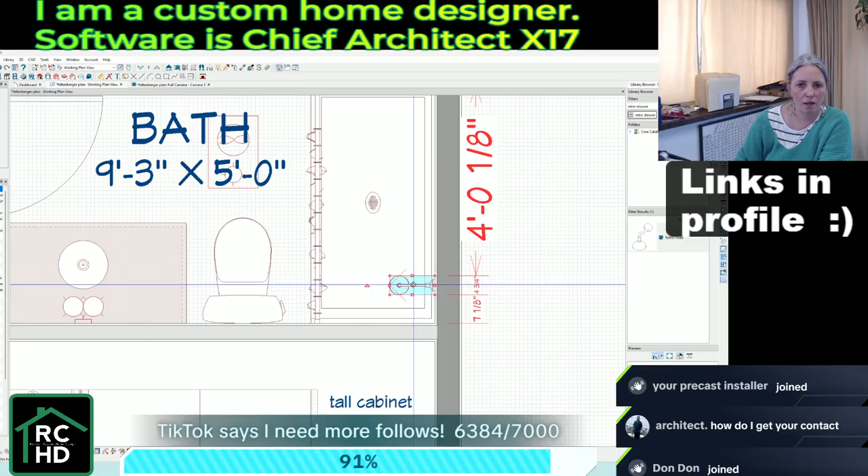Okay, pull that. I also don't have a sink faucet in here.

With the sink faucets, I align it with the midpoint of that cabinet, and then I drag it back to where I want it. Now my kitchen, I already had a faucet in there because I'd copied that from a previous project, so that's good. And then here for the bathroom, I will do the same thing - align with midpoint. There we go.

And then I also don't have a mirror above my sink. So we'll go ahead and put that there. Oops.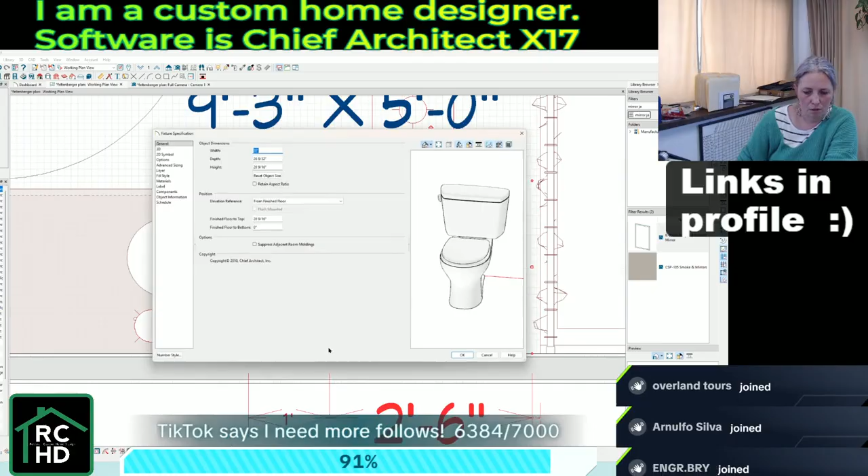We'll open this up. I want the bottom edge to be 40, height to be 38, and I'll adjust the width manually. This is just a placeholder for your standard builder grade mirror. And then we'll do a different mirror out in the garage.

Actually, you know what? That's too fancy for out there.

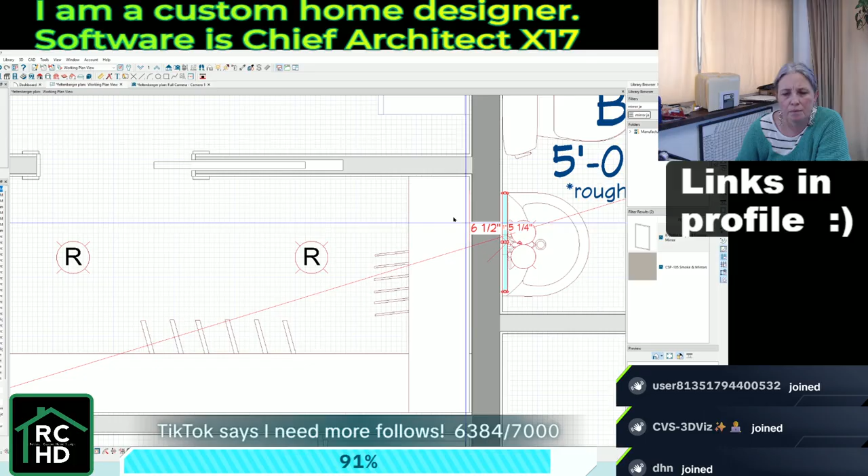Again, we want the bottom. There we go, that's good. Okay. And then lastly, I like my center cabinets to have a double door. I think it just looks nicer.

Thank you. Everyone keeps asking me the font. It's a font within the software, called Architect's Daughter, I think. Or no, Chief Blueprint, Chief Blueprint. But really it doesn't make a difference. Export picture.

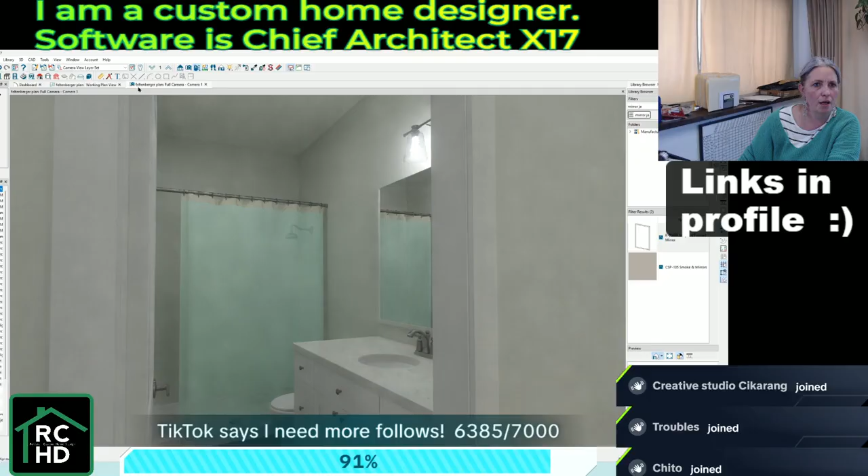Okay, then we turn the corner, and then I'm going to open both of these doors. Okay, first we'll show this just the way it is. And we'll come in here.

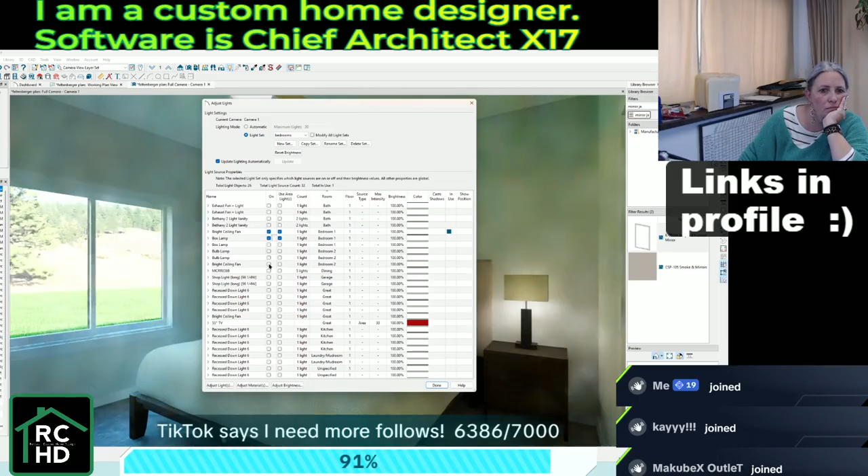Now I need to turn on a different light set, so we'll do new set, bedrooms. Okay. And I'm going to adjust my sunlight just a little bit because it's not on the right side of the house right now. There we go.

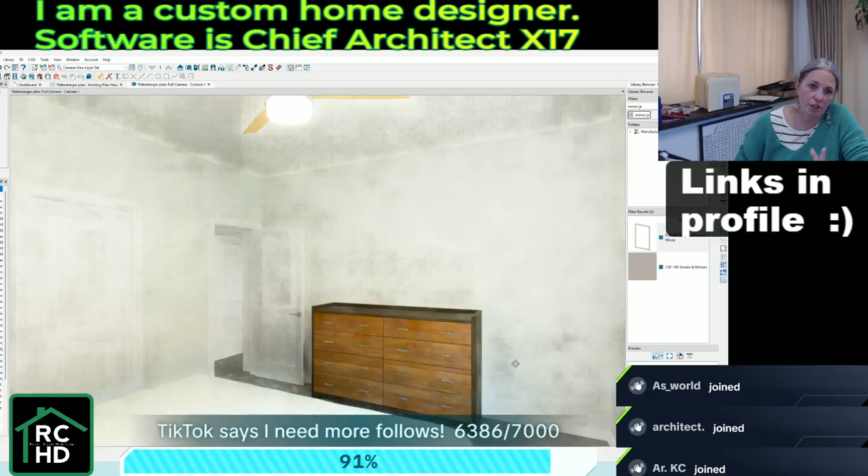Okay. My pricing is not per square foot, so it's a flat fee, kind of based on the size of the project, but also based on the complexity. When I used to charge hourly with a square footage bump, it was only based on the livable space. So, personal preference, I don't charge differently for patios and carports. And like I said, now I've switched to a flat fee structure, so it doesn't even factor in anymore.

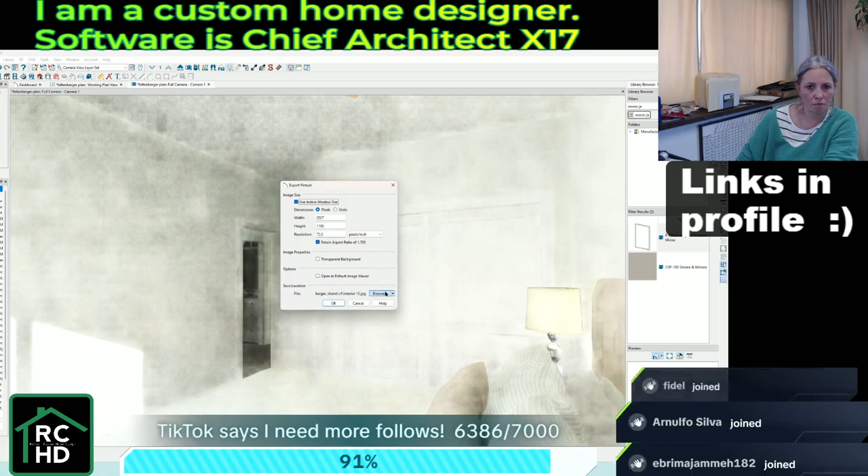Okay, and then the other bedroom. All right, and then the last thing that we need to do is the garage.

So we'll do one more light set, and that will be the garage and the bathroom in the garage.

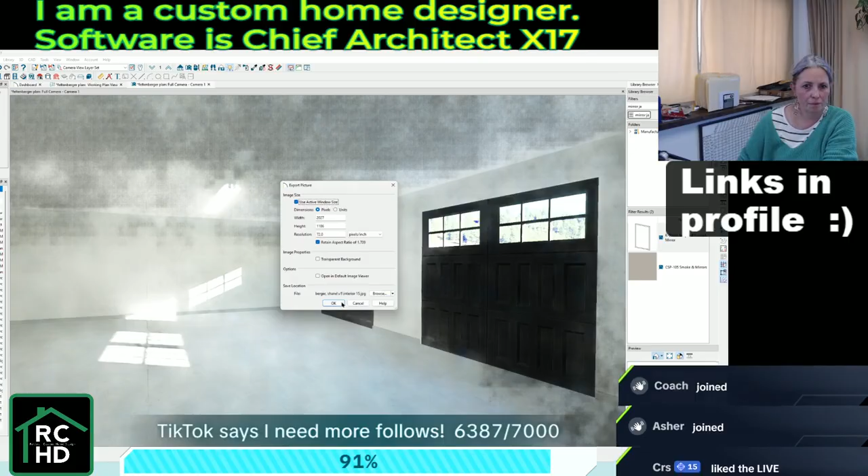So obviously here on this side, it's pretty straightforward. So then I just take all these images and I pop them over into Canva into a slideshow.

I think I want that door to be black on this side.

So same thing here, file, export.

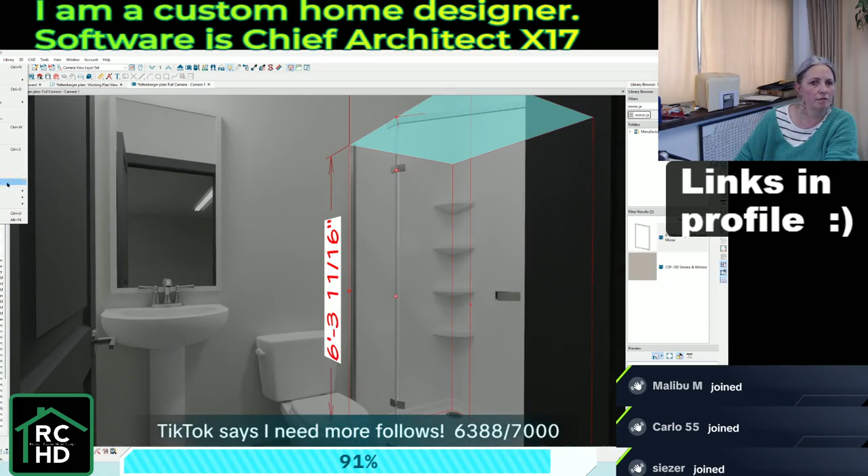All right, cool. So then now I'm just going to reset my camera out here. I'm going to quick change my light set back to the exterior set. Now at some point I'll add exterior sconces and whatever else, but I'm not too worried about that right now.

And then before I close this, hit save, but also right click save camera, because what that will do is save all of my settings, like my backdrop, my lighting, things like that. Otherwise I'll have to reset the backdrop, reset some of those things down the road.

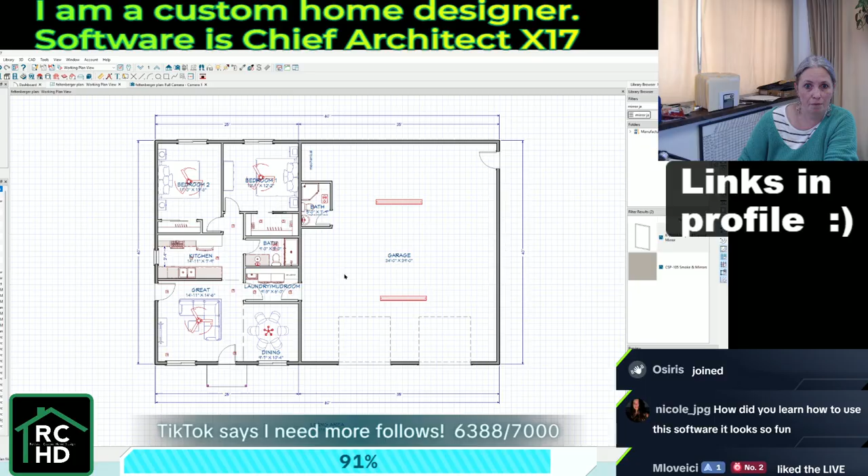And then the last thing that I do here, export a picture of this plan, and then export a PDF, so that way my client can kind of zoom in and see things a little bit more in detail.

How did I learn? I learned AutoCAD when I was in college, and one of my first jobs here after college was using Chief Architect. So the guy said, 'You know how to draft,' handed me a 1,200 page printed manual for Chief Architect and said, 'Here you go, figure it out.' About a year or so later, another employer of mine who also used Chief Architect sent me to the Chief Academy training in Coeur d'Alene.

And then I've just been using it for 20 years. The last 2 years I've gone back to Coeur d'Alene and done additional trainings, and I'm planning on going again this year. So it's just one of those things that you always kind of keep up on. They have a really great video library you can choose from that you can watch and kind of learn a lot of things, but a lot of it's just doing it.

So, all right, now I've exported the PDF. I've got the images. I'll pop this into Canva, send this over to my client, and hopefully get the seal of approval. So, pretty darn awesome, we designed this entire house in an hour and 15 minutes today.